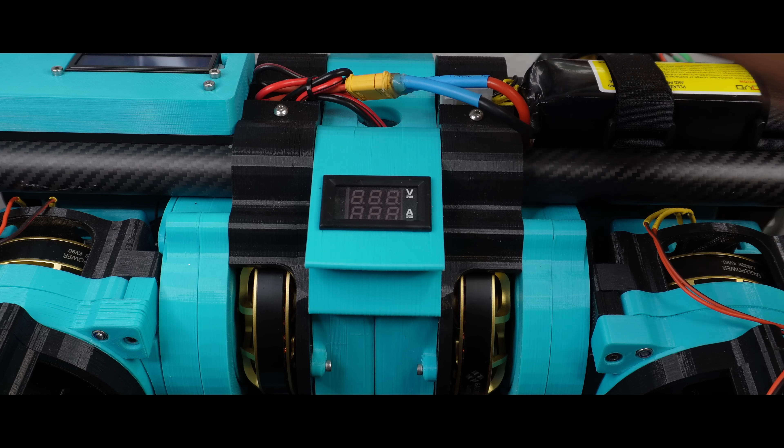For the past 4 months, I have been building a quadrupedal robot. And what will I do with this marvelous technology? How will I use it to change the world? To advance research? To cure cancer?

Welcome to part 3 of building my robot dog named TOPS, which stands for Traverser of Planar Surfaces, and also spells spot backwards, which is the Boston Dynamics robot. This is easily the biggest and most complex project that I've built so far, which came with many challenges and lots of failures along the way.

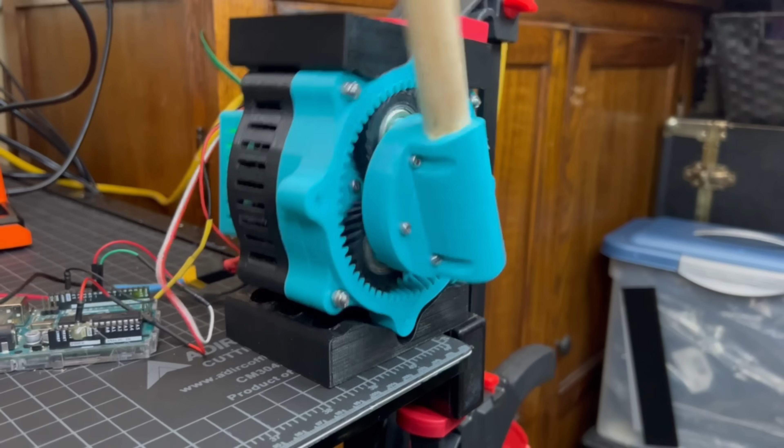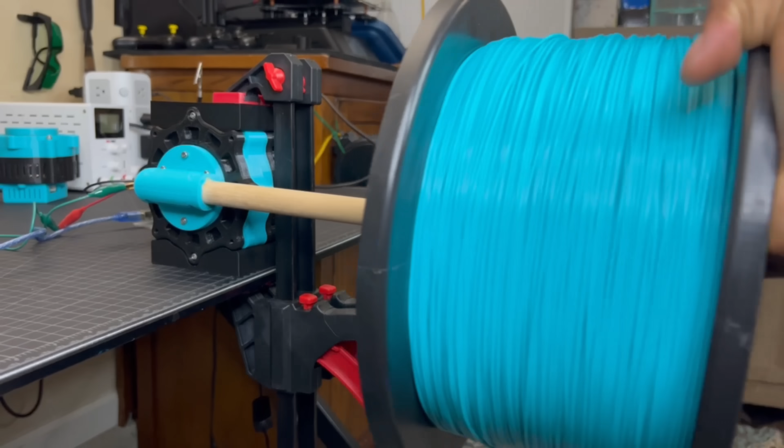Today, we're going to be building TOPS from the ground up. Before watching this video, I recommend you watch parts 0, 1, and 2 of this series, but here's the quick crash course. In the unofficial part 0 of this project, I built my own quasi-direct drive actuator using a brushless motor, an FOC controller, a planetary gear set, and an ungodly amount of test prints. I really liked this actuator design, so I decided to try my hand at building another robot dog, this time hopefully making it a lot more dynamic.

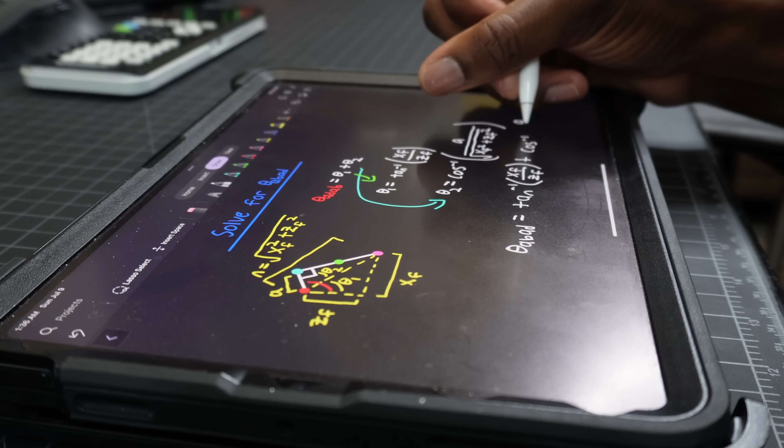In part 1, I built 3 actuators and used them to build a single test leg. I also derived inverse kinematic equations to move the foot precisely and programmed some gait sequences.

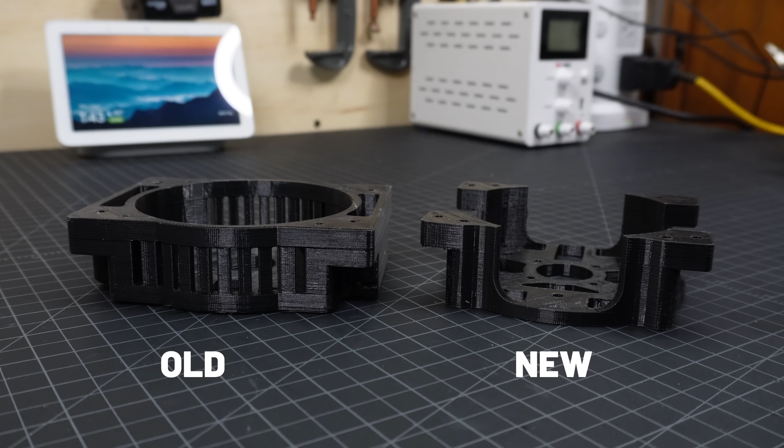Now, this leg design wasn't great, so in part 2, I went back to the drawing board and designed a better leg. This time, I made the leg stick out less, made the design more open so that you could see the motors turning, shaved off about a pound of weight, and switched communication protocols to CAN bus, which reduced wiring by a lot. This leg performed and looked a lot better, but this came with one major trade-off, which was that now I would have to manually home the legs at startup, since there isn't an official CAN bus library for the motor controllers that I'm using.

But it gets better, because in part 2, I was also able to get the leg to jump, which definitely left things on a high note.

And with that, we arrive at this video, part 3, where I'll be designing and building the full robot. So, let's get started. Now, the approach that I took to building the test leg was to have the actuators make up the main body of the leg.

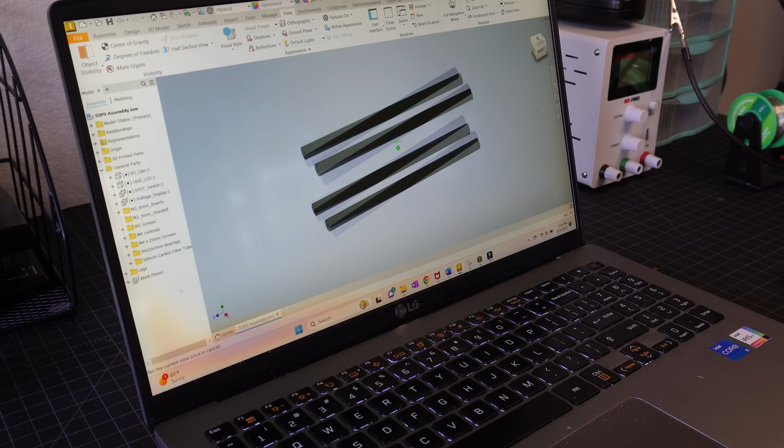Since that worked well for a single leg, I'm going to be applying that same design strategy for the full robot assembly. I'm starting off the CAD model with 4 carbon fiber tubes that are going to make up the entire frame of the robot.

Each of the legs is going to slide onto 2 of the tubes, making a sort of leg kebab. And if we have something in the middle to hold the 2 tubes together and 2 panels on either end for extra support, then we should be able to make a really secure frame with very few parts.

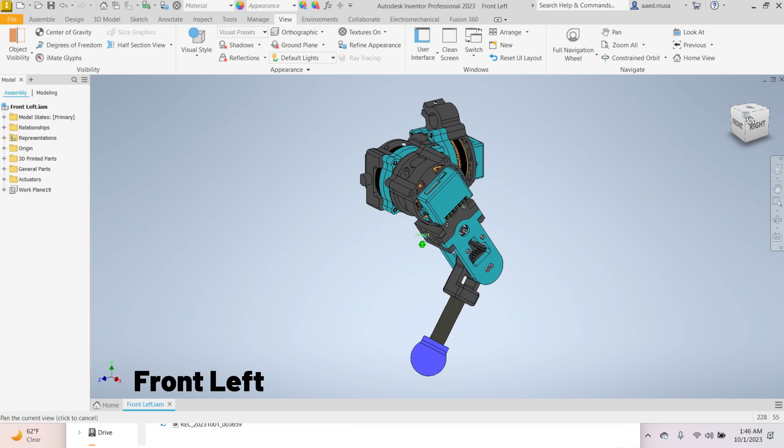Now, designing the legs is going to be quite easy. I already have one design, the front left leg, and all I need to do is slightly reconfigure the orientation of that leg in order to derive the other 3 leg designs. Once that's done, I can drop each leg into the main assembly, fit them onto the tubes, design a couple more parts, and then we have a full robot designed.

Now it's time to actually print the parts. According to my slicing software, it's going to take about 133 hours, or 5.5 days, to print everything on my one printer. And factoring in a bit of transition time in between prints, we're looking at roughly a week of non-stop printing.

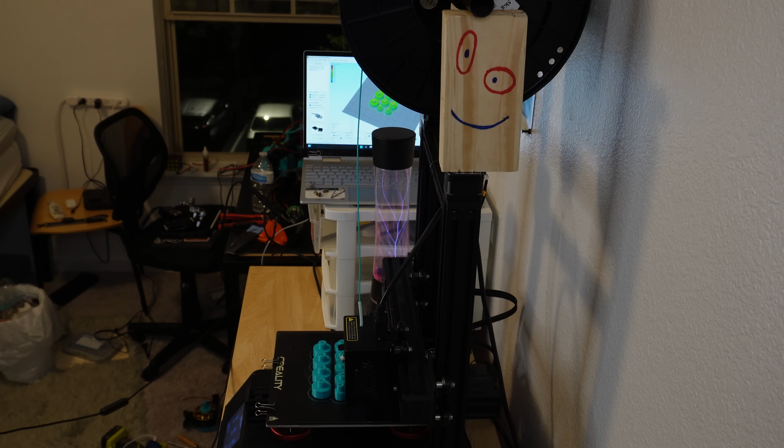So it's been 3 weeks and I'm still printing, which just goes to show that other than being nowhere near the realm of reality, computer estimates can be quite accurate. With the parts that I do have at the moment, I can start building a good chunk of the bot.

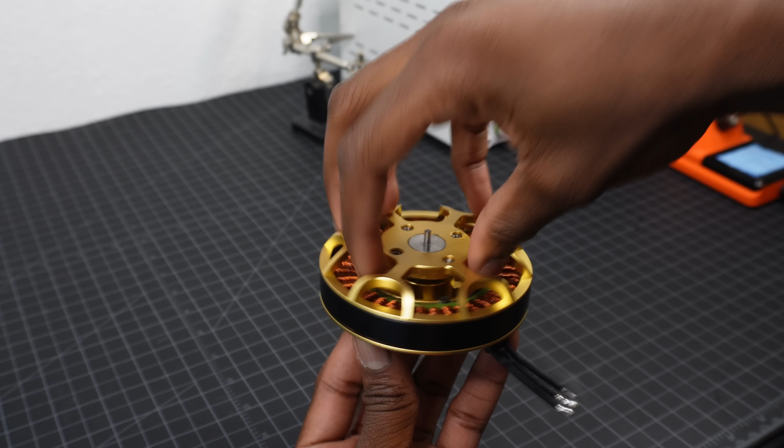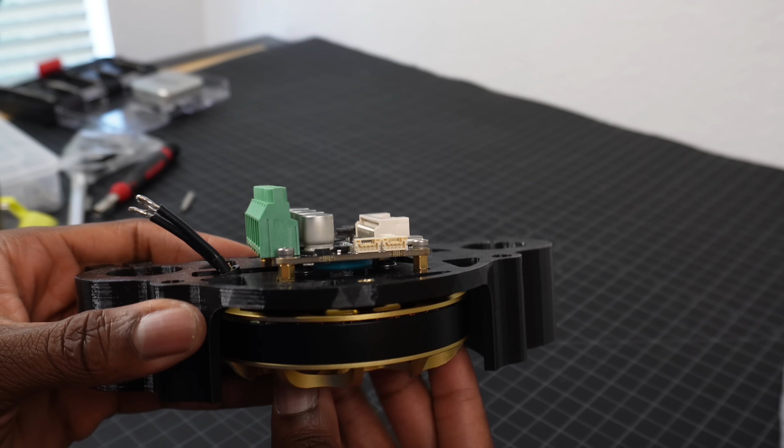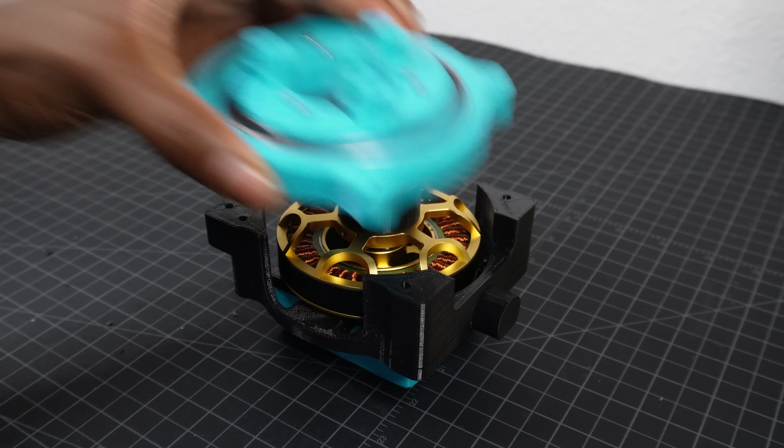The first step is going to be building all 12 of the actuators. For that, I'm using 12 high torque 90 KV brushless motors and 12 ODrive S1 brushless motor controllers with position, velocity, and torque closed loop control. I fit an encoder magnet onto the back of each motor, and then I'm going to put an ODrive onto the back of each motor housing. Next, I added bearings to some of the parts, fitted sun gears to 8 of the motors, fitted pulleys to the other 4, screwed on the gearboxes, and added the planet gears.

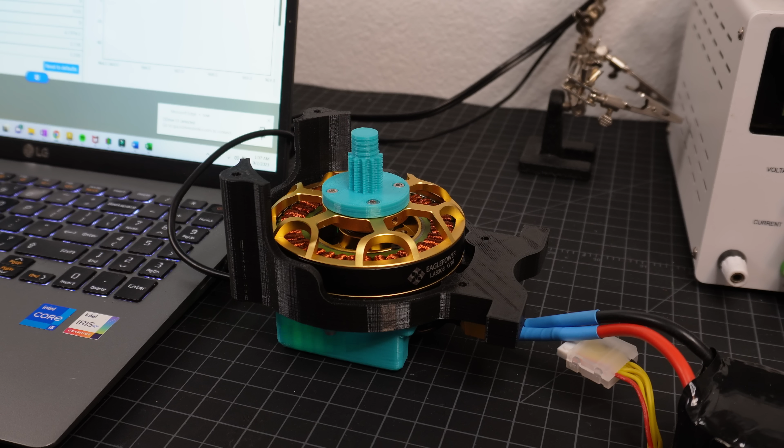To get the actuators up and running, I'm using the ODrive GUI to change settings, calibrate the motors, and define each actuator's CAN bus node ID. I'm also doing a quick spin-up test on each actuator to make sure everything is running smoothly.

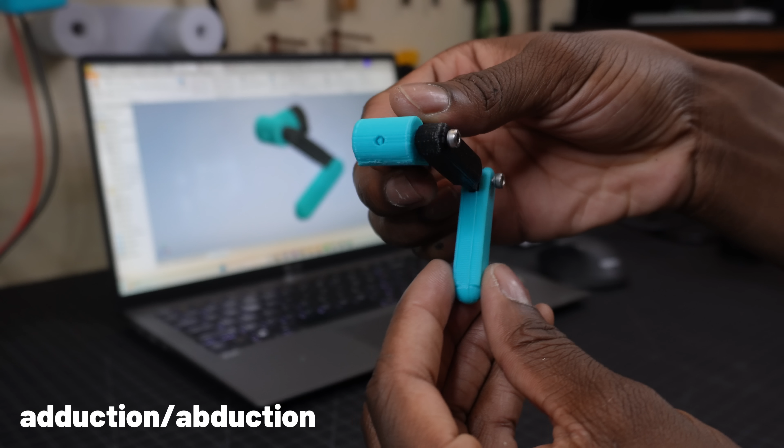And after screwing on each cover, we now have 12 actuators. You'll notice there are 3 different types of actuators, and that's because each leg has 3 different joints: an adduction joint, a hip joint, and a knee joint. These each fit together to form the body of a single leg assembly.

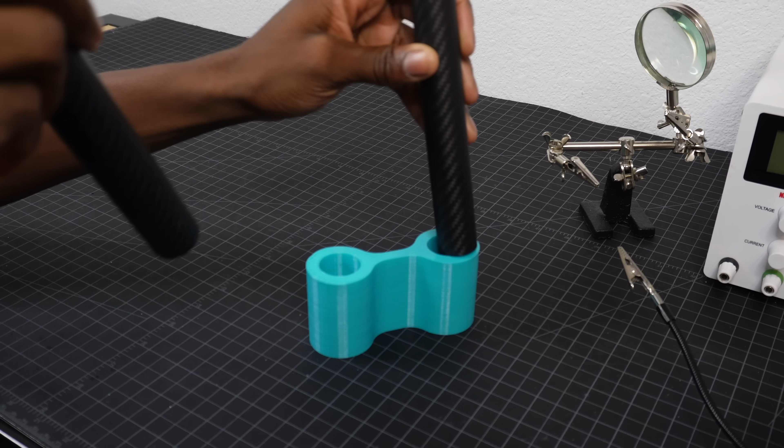With 3 more leg assemblies, 4 carbon fiber tubes, and 2 middle section pieces, we can form the main body of the robot by assembling everything together.

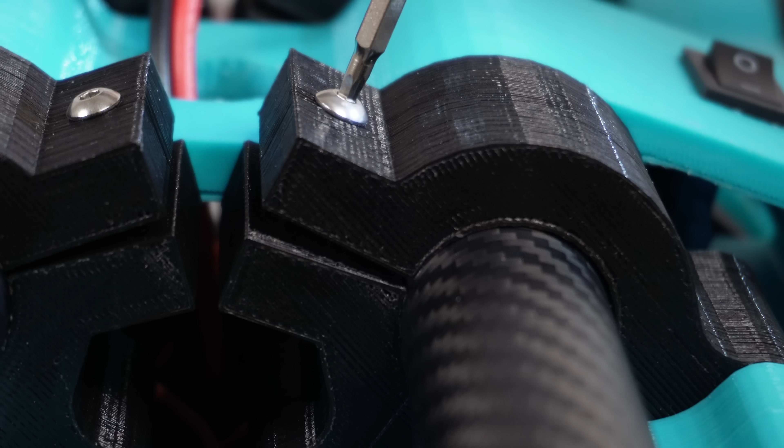I've integrated these clamps into the design of each adduction actuator's housing so that we can prevent the leg from sliding on the tube. And although it looks like there's a nut on the other side, just know that there isn't. It's held on by hopes, dreams, and a hole with zero tolerance.

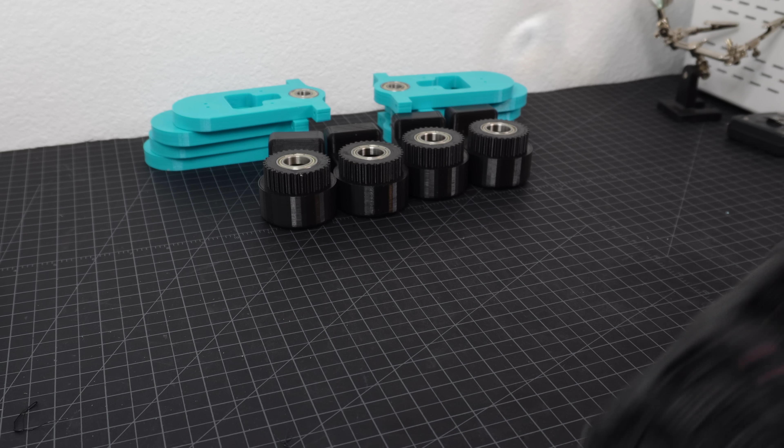With more prints coming off the printer, it's time to move on to building the legs. We'll start by pressing more bearings into some of the parts. These spacers are going to connect the upper and lower leg. I'm using high torque drive belts so that the knee actuator can actuate the lower leg.

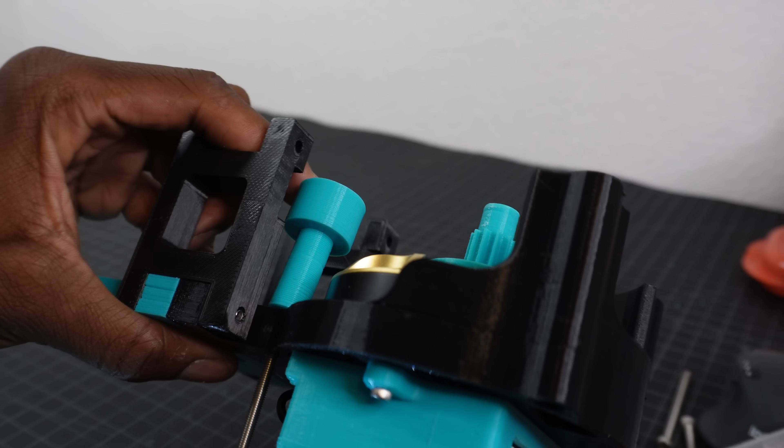The pulleys and idler pulleys all slot in on this panel piece, and we can add the belts and other idler pulleys to get our 9-to-1 belt pulley gear reduction. Now we can cover it all with the other panel piece, and as you can tell by now, we have to do this 3 more times to make our 4 legs.

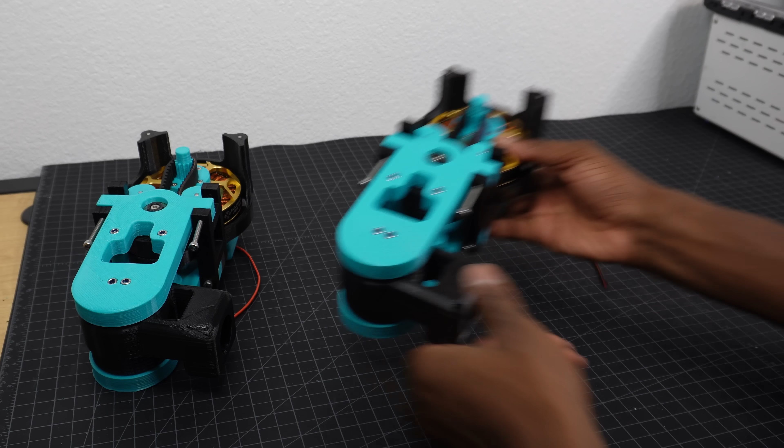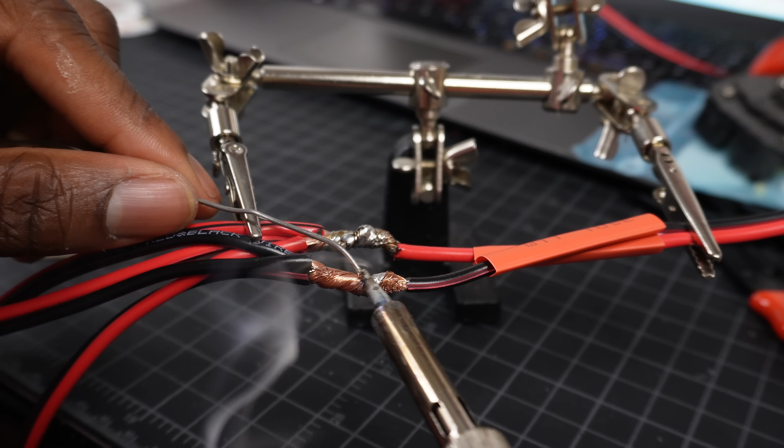All 12 of the actuators will be powered by this high capacity 6-cell battery. The actuators will also be daisy chained via the CAN low and CAN high lines. Those 2 lines connect to a CAN bus transceiver, which connects to the brains of the robot, a Teensy 4.1 microcontroller.

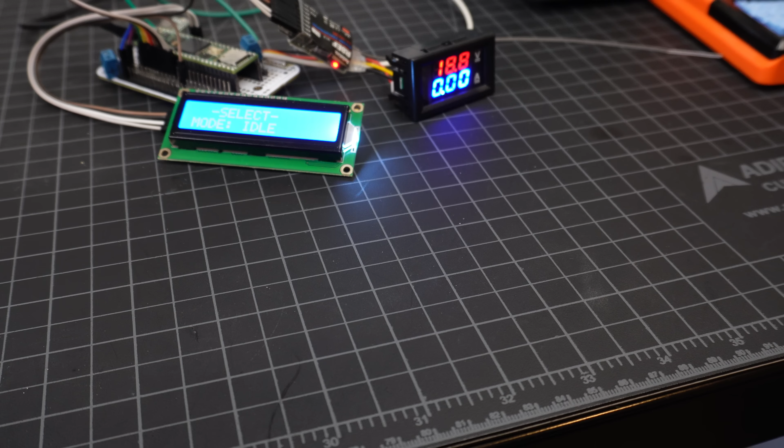I'm going to be using an RC remote and RC receiver to control the robot, and a small 16x2 LCD to act as a menu for different control modes. I'll be using this voltage display to monitor the battery, and I'll be using a voltage regulator to step down the battery voltage to 5 volts in order to power the Teensy.

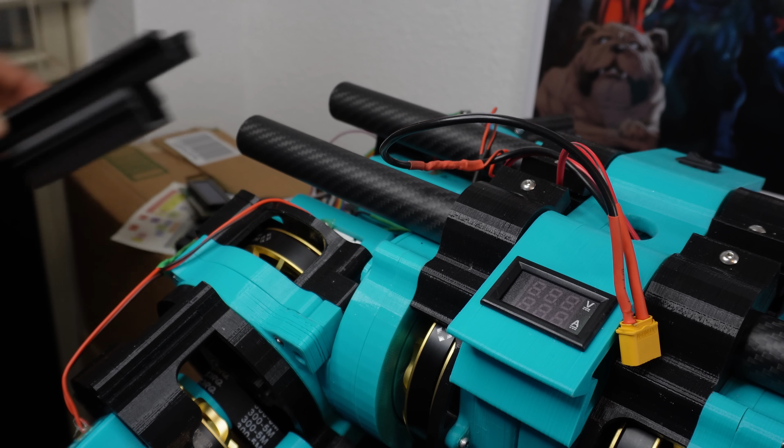And now, let's test the circuit. Alright, so here's the first power up test. Let's hope I don't burn down my apartment.

Here goes nothing. Woo! And we are alive.

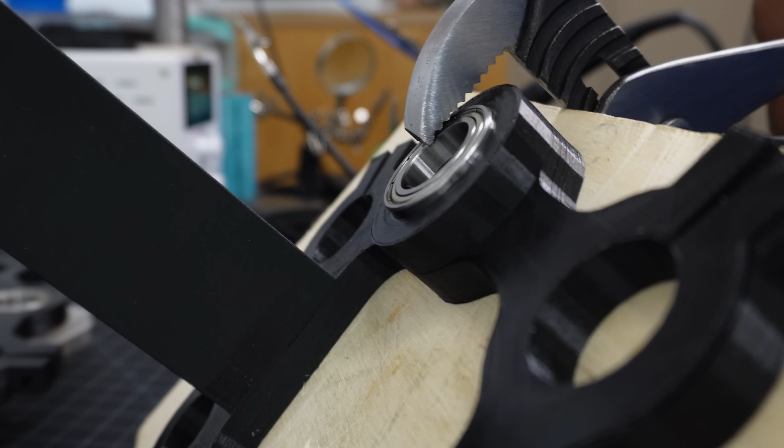Now I'm going to add bearings to the front and back panel pieces. As mentioned, the panels will serve as a way to hold the carbon fiber tubes in place. They will also serve as a way to further constrain the rotation of the adduction joints.

It's a pretty tight fit, so I have to hammer the pieces on. I'm also using clamps here to prevent them from coming out.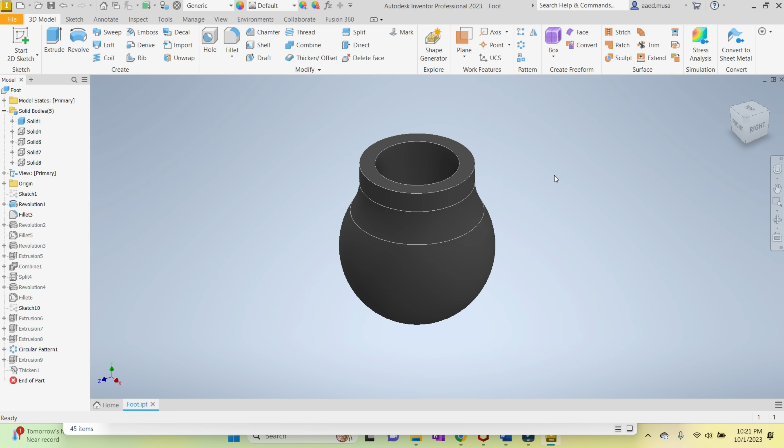I bought this silicone mold kit online. It has a shore hardness of 30A, and according to online scales, this is somewhere between the squishiness of a rubber band and an eraser. The base of the foot is 3D printed, and the goal is to cover the outside of the base with silicone by suspending it in between 2 molds, which are also 3D printed.

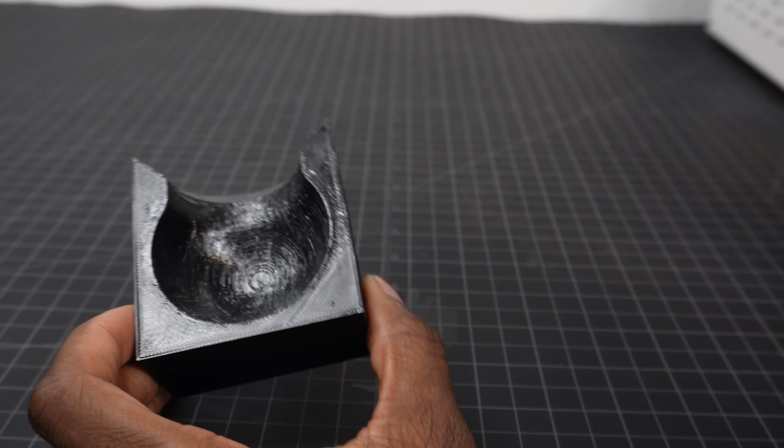I'll start by pouring out equal parts of each A and B mix, then I'll stir it all together. I'm using Vaseline as a releasing agent since I'm not really sure how silicone acts with PLA. After clamping the 2 halves of the mold together, it's time to pour the mix in and let it sit overnight.

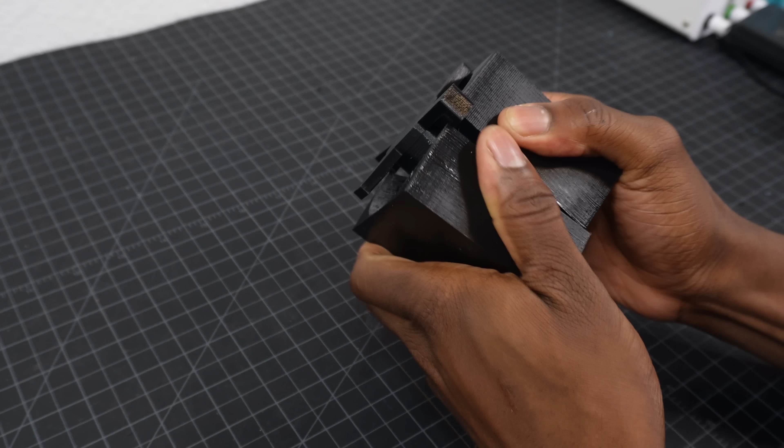Once the silicone has cured, I can take the molds apart and wash off the foot. It actually came out quite well, and it definitely has a lot more traction than the printed foot.

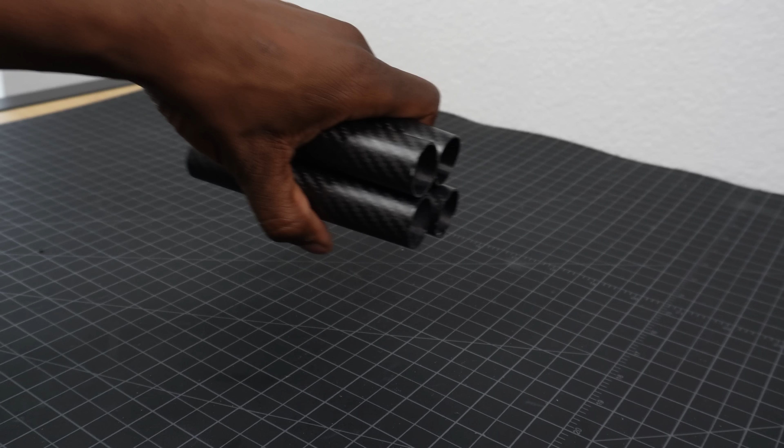As always, I've gone ahead and made 3 more and glued them onto these carbon fiber tubes, which will then be glued onto each leg.

So now that the robot is pretty much assembled, it's time to program it. And as you'll see, this was one of the more challenging and frustrating parts of the build. Initially, I couldn't even get it to stand up.

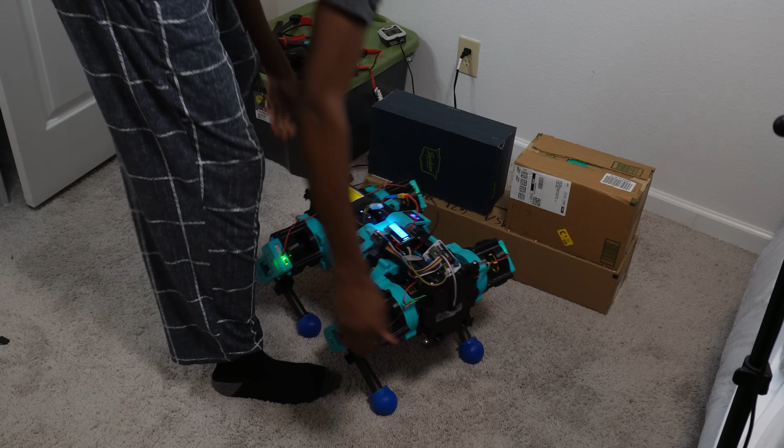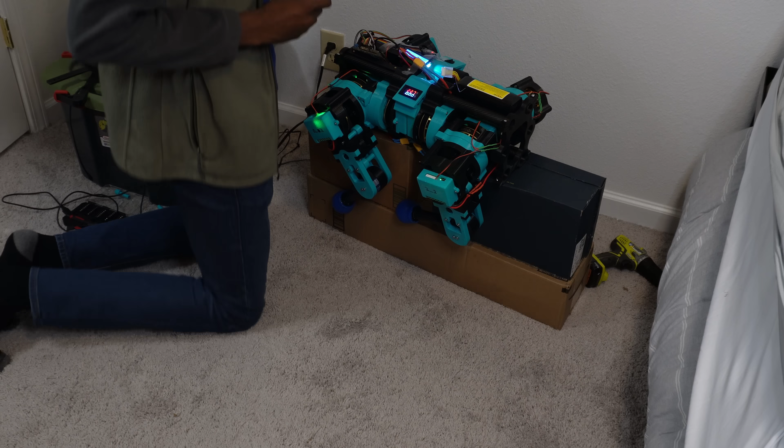What happened here is that the belts on the back legs skipped. To fix this, I reprinted bigger idler pulleys to increase tension. I also slightly changed the normal leg positions in software to prevent the back legs from taking on too much of the load. And now that it can stand, let's get it to walk.

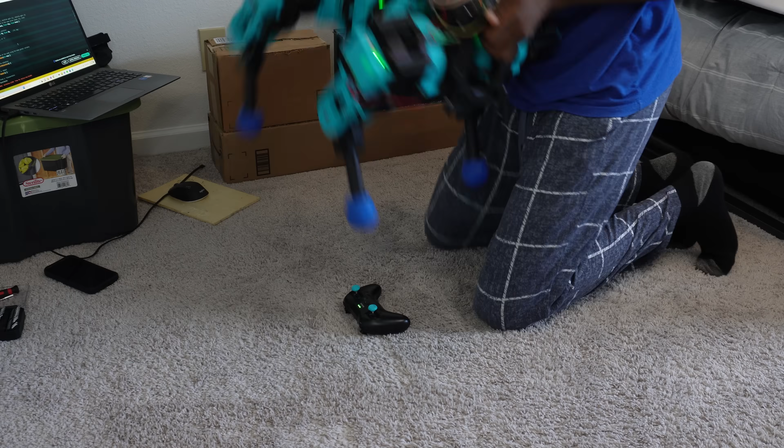The main principle in getting a quadruped to walk, or turn for that matter, is to always have a pair of 2 diagonal feet in contact with the ground at any given moment. This is otherwise known as trotting, and it's what allows TOPS to maintain balance. Now let's talk about what a step trajectory looks like. I had originally planned for a sinusoidal step trajectory, but it just didn't work. So I reverted to a more crude but reliable square step trajectory. Here the foot moves up, forward, down, and back.

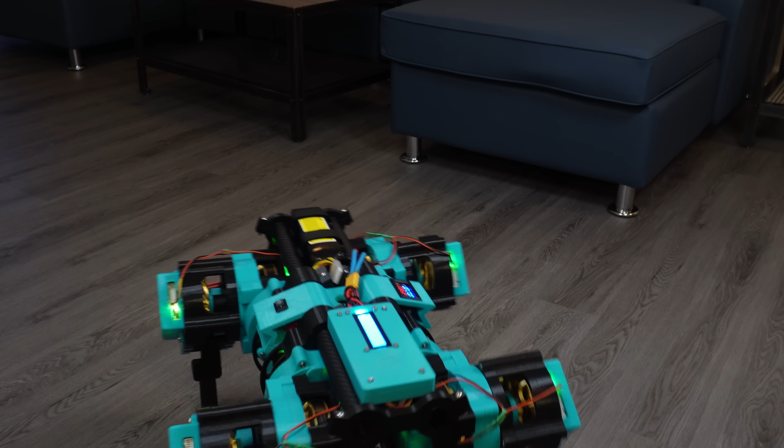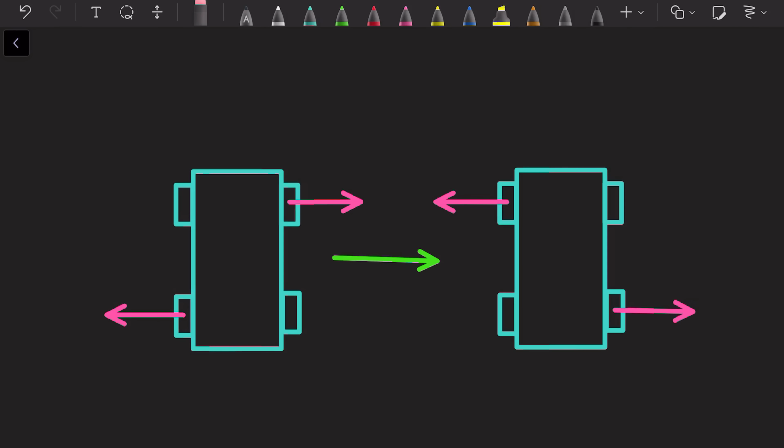Now getting the robot to trot forward is essentially a 2-step sequence. You first need to have 2 diagonal feet take a step, and as soon as they touch the ground, have the other 2 diagonal feet also take a step. If you keep the same sequence but have the feet move backwards, then the robot moves backwards. If instead of backwards you move the feet right or left, then you get the robot to move sideways. The only motion that may not be as intuitive is turning. Here, you actually want diagonal feet to move in opposite directions.

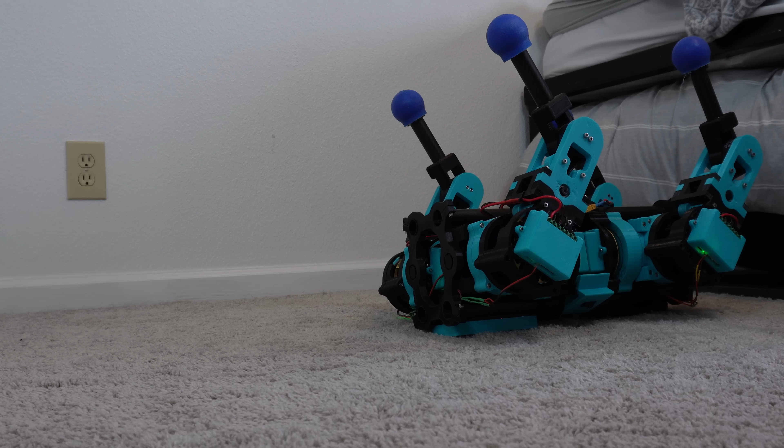Now, these sequences are actually pretty simple, but as often in engineering, concept is one thing and implementation is another. The challenge with programming a quadruped is that there are so many different variables to consider. For example, the amount of time each leg is off the ground, how far the leg lifts off the ground, how big each step is, how fast the leg accelerates, and the list goes on. These factors not only determine if the robot can walk in the first place, but how dynamic that walking motion is. This meant a lot of programming, testing, and failure, followed by more failure, and even more failure.

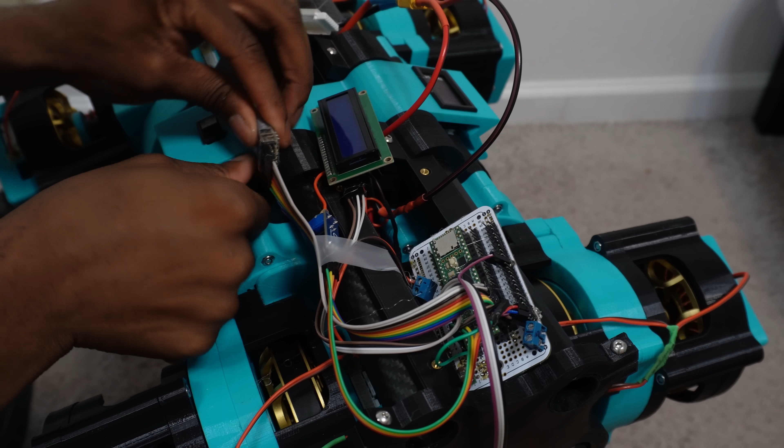But eventually, you kind of get something that works. And that's what this robot does. It just works. Not the best, but it works. There are so many hardware and software issues with this robot that I almost considered not finishing this project at all. But before I explain exactly what I mean, it's dance time.

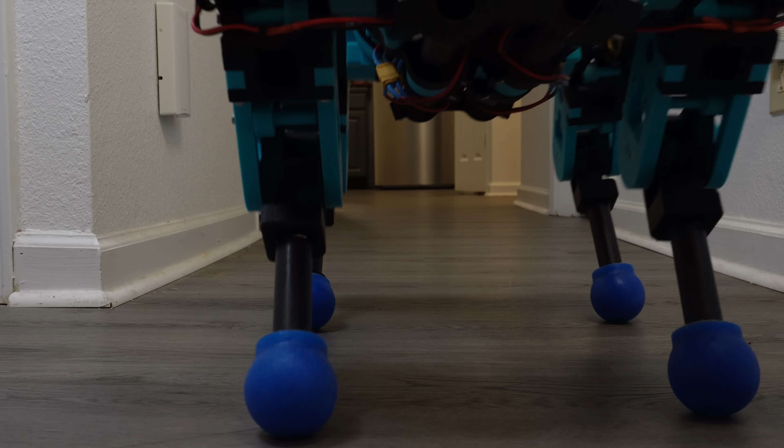Now, with that out of the way, let's get to the good, the bad, and the ugly.

So, what do I like about this project? Well, it walks, which was definitely a major goal, but I think the best part of building TOPS was being able to make my own custom actuators. Turns out, 3D printed planetary gears can work pretty well on large-scale projects.

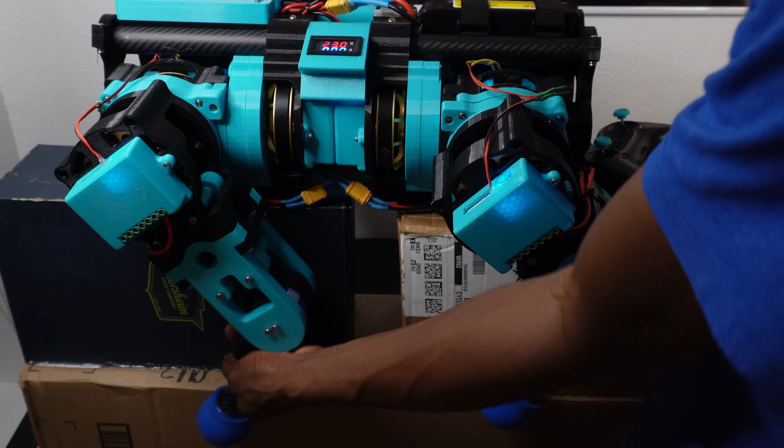Now, what I hate about this project is that it could be a lot better. And maybe it's just the engineer in me, but I'm never really satisfied with anything I build. And this is no exception. The main limitation on the mechanical side is that the joints skip like crazy. Because of this, the robot can't do things like jump or take a hard step, because when the belts do skip, I have to recalibrate the entire robot, which leads me into problems in software. Having to calibrate each leg on startup gets really annoying really fast. The other software issue was just a lack of natural dynamic motion.

Programming gait sequences is really hard, and my code was pretty minimalistic. I also didn't use any IMU sensors, which means that apart from the natural compliance of the actuators, TOPS isn't really reacting to the environment or any external forces. This is kind of like having a Tesla without any of the autopilot features. Your car is never going to be able to navigate itself, but it's still usable, just a lot less cooler.

I hope to fix all of these issues in TOPS V2, which I'll be making sometime in the future. But for now, I'm going to be moving on to other projects. You see, because of this project, I now have 12 high-powered brushless motors and motor controllers at my disposal. So as you can imagine, there's a lot that I could do.

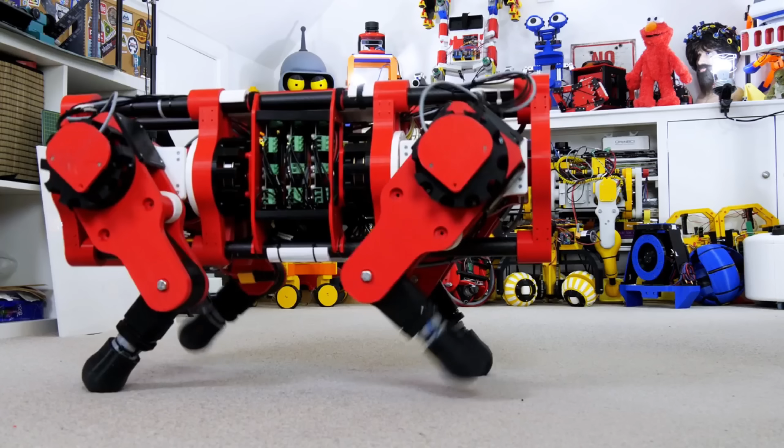I want to end this video by giving one special acknowledgement to the YouTuber James Bruton. I stole a lot of the design ideas that he implemented in his robot dog. Things like using carbon fiber tubes for the frame, casting the feet in silicone, and even the exact type of motor that I used came from watching his videos. So if you haven't already, definitely check out his channel.